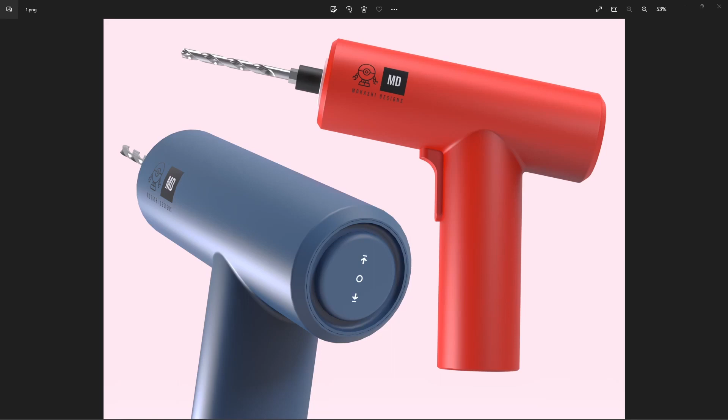It's Yash Mukash here, and now we are going to see how to create a 3D model of a minimalistic drill like this in Fusion 360 software using commands which you have seen earlier.

So let's get started. I have already created a drill machine, this is what I created. I majorly used the extrude command to create this cylinder, this grab handle, this button, and these cylindrical mountings with the drill bit. After that, I copy pasted this drill machine, gave them colors red and blue, and then did the rendering part in the rendering workspace. So that's it, let's get started.

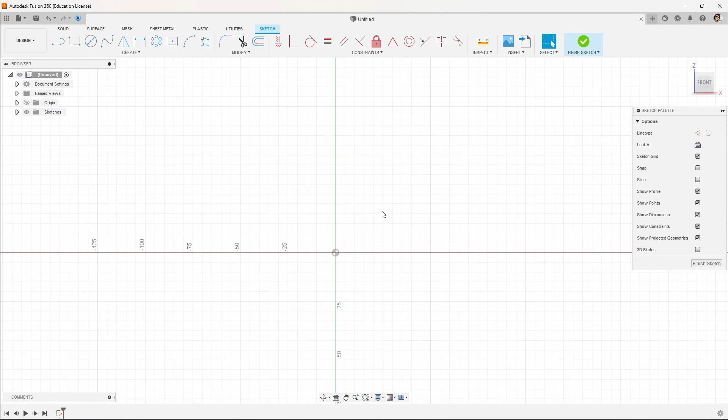First, we will start with the main cylindrical body. For that, first you have to create a sketch. I'm going to select this plane, then create a circle like this. I'll give it a 100 mm dimension and then finish this sketch. After that, select this profile and go to the extrude command.

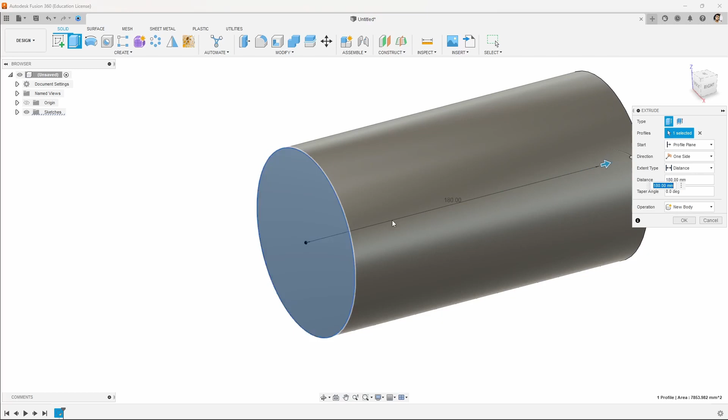I'm going to rotate it a little bit for a better view and then drag it just like this. Okay, drag it, and a little bit more, yeah, that's it, then hit OK. Once you've done it, now we have created this cylindrical body. Now we will continue with this cylindrical main body.

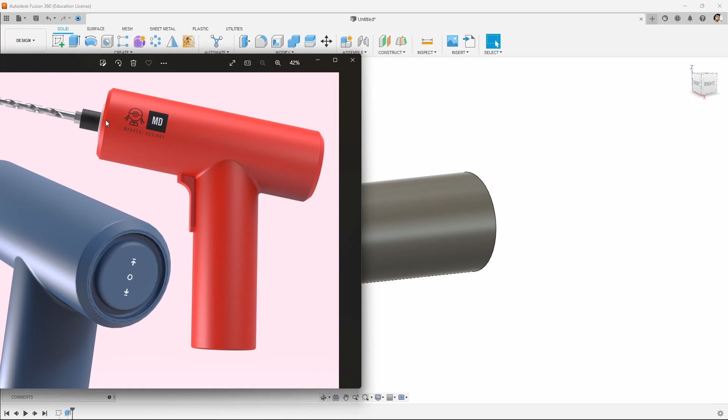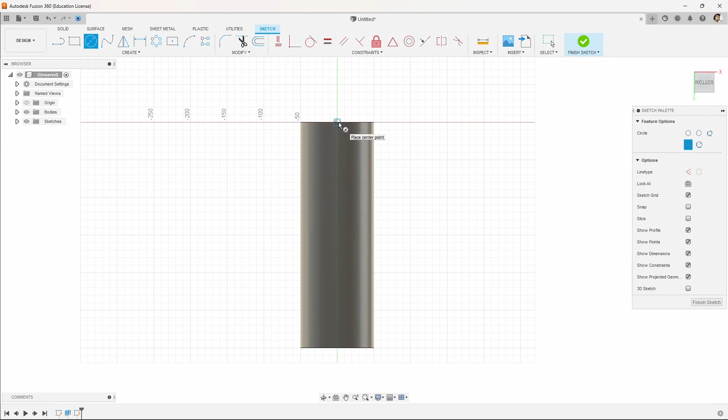Now we will create this grab handle, and you can see this is a little bit at an angle. So what we will do is create a body and then join it. First select this plane, then create a circle using reference of this center point. You have to draw a circle of 95 mm, then hit enter, then finish this sketch and select this profile.

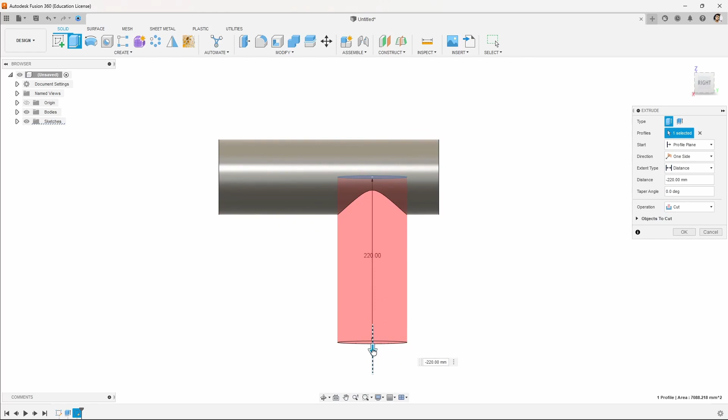Then just drag it like this. Now if you can see, this is cutting this cylinder. We don't want that, so we will change the operation in this extrude dialog box. Right now the operation is cut, so we will change it into new body, then drag it a little bit like this and hit OK.

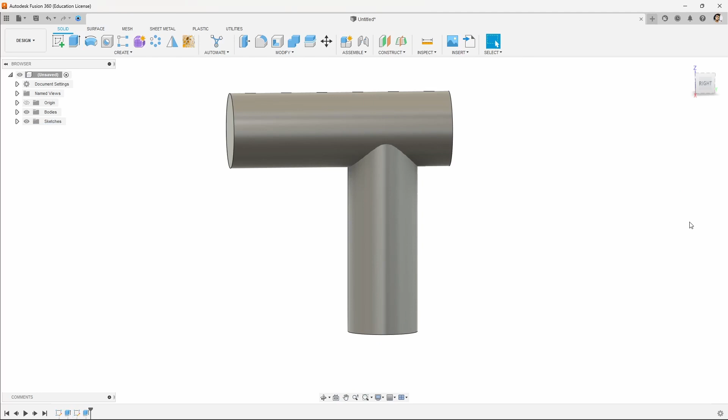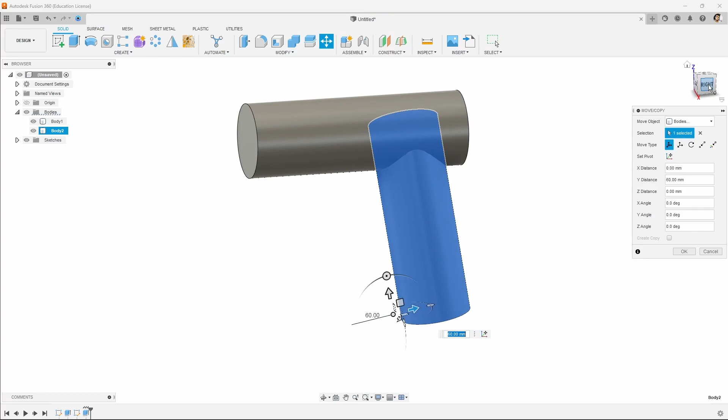Now in the browser, if you drop down this body section, we have two bodies. I have selected this one. Just right click in your canvas, select the move command, rotate it a little bit like this and place it over here. We like something, yeah this is good, then hit OK.

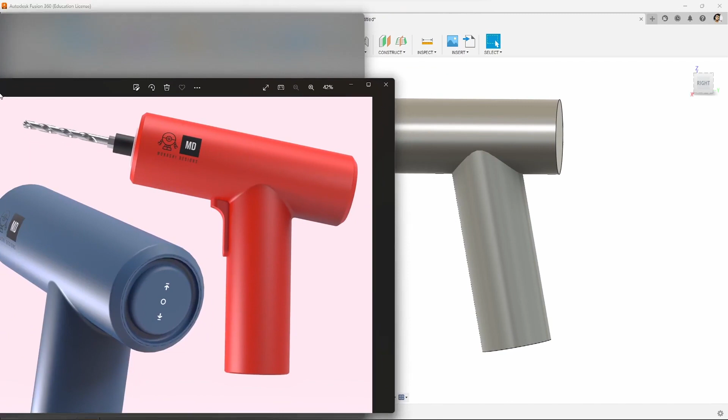So basically what we have done is created a body similar to like this. So this is a basic overview. Now we will do the detailing.

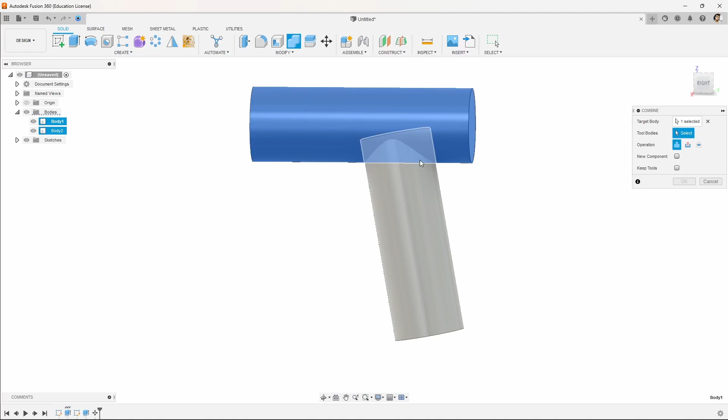First, join these two bodies, and for that go to the modify tab. You will find this combine option here, or you can click here for the shortcut, then select these two bodies and hit OK. If you see the change, now these two bodies are combined together and create one new body.

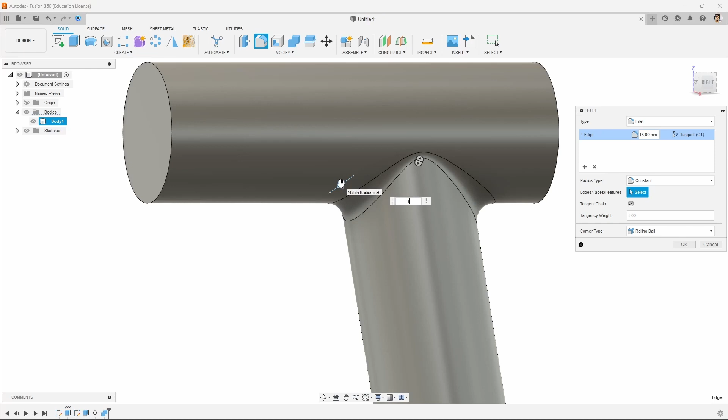Now we will add some fillet at this edge, and for that go to the modify tab and select the fillet command, giving a fillet like this. I'm giving 10 mm fillet and then hit enter on your keyboard. Now I will do a similar fillet over here at the bottom of the grab handle of 5 mm.

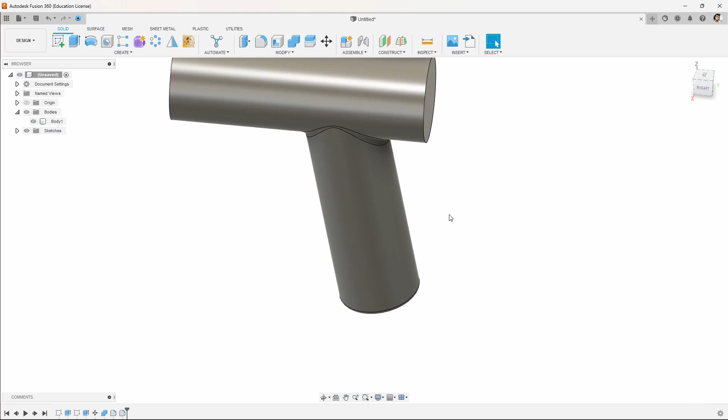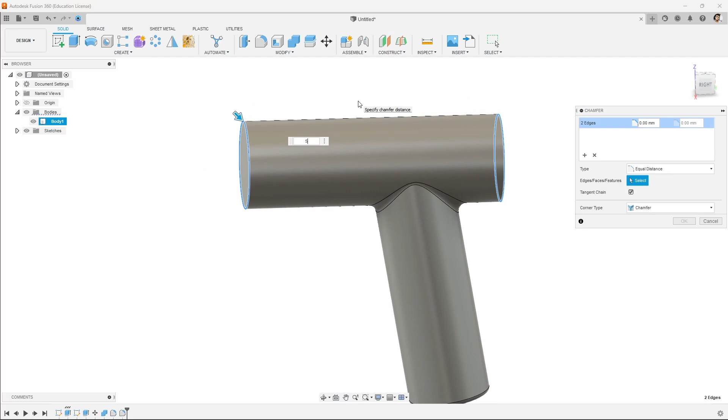Okay, that's better. Now I will create some chamfer over here at these two edges. Go to the modify tab and select chamfer, or you can click on your keyboard and create a shortcut for that also. I'm going to add some chamfer over here like this and then hit OK. If you can compare these two designs.

So what we have done is create first a cylindrical body, then a grab handle, and combine these two bodies, then give a fillet over here, and then add a chamfer at the end of this cylinder.

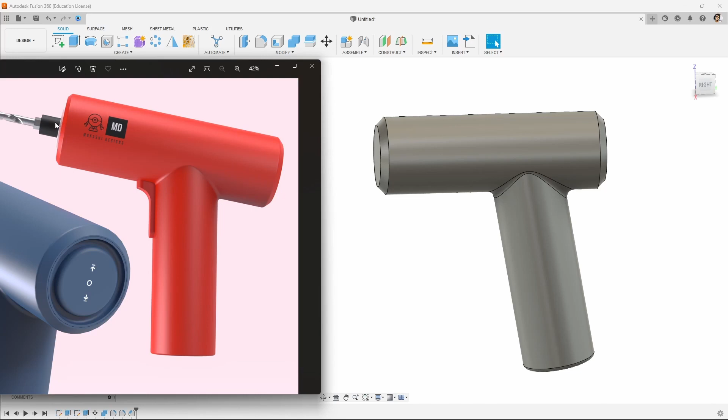Now we will add these two mountings and then add a drill bit. For that you have to select this plane first, then create a sketch on it, select a circle, select the center point and draw a circle of 55 mm, then finish the sketch.

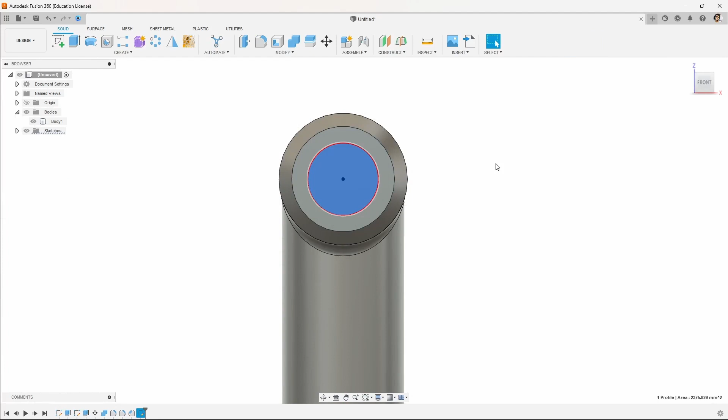You can give dimensions according to your need, I'm just giving the dimension in an aesthetic way. Then hit E on your keyboard for extrude and extrude it a little bit. This is too far, okay, 5 mm is good.

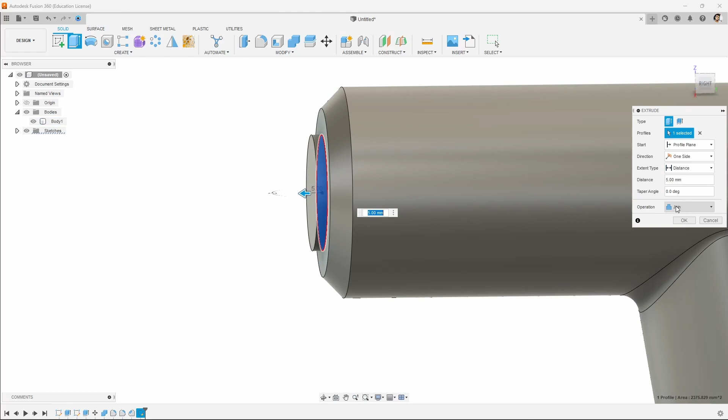You can see the operation is joined now, that means this body will combine with the original body. We don't want that, so we will change the operation to new body, we want a new body, a new part there. Then I'll hit OK again.

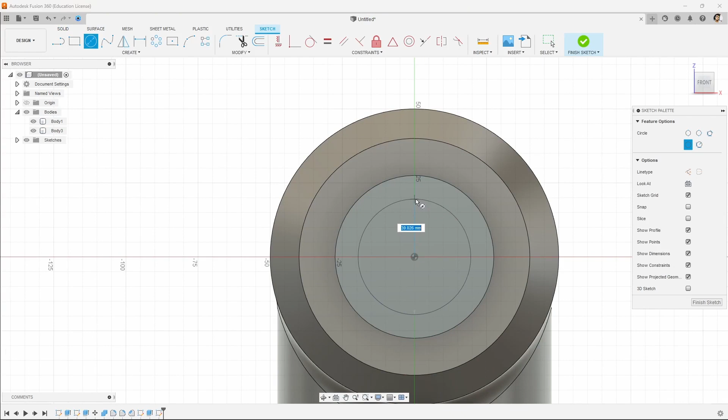Again select this face and create one more circle which is a little bit smaller than the previous one. Select this profile, then extrude it again, something like this. Again you can see the operation is joined, we will change it to new body and then hit OK.

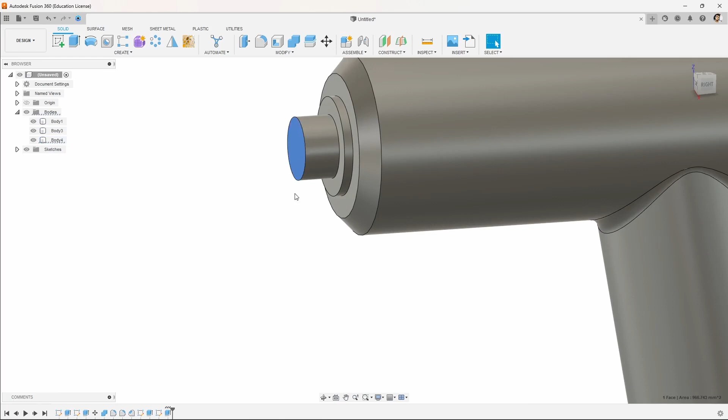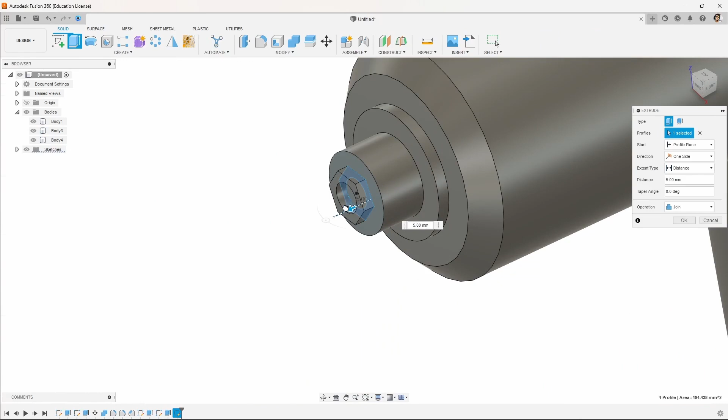So basically we have created a mount and we need a mounting part over here. For that I'll again create a polygon. Just go here, click here, and create a little polygon like this and add a circle to it. Finish this sketch and create an extrude of this profile like this, then create a new body operation and hit OK.

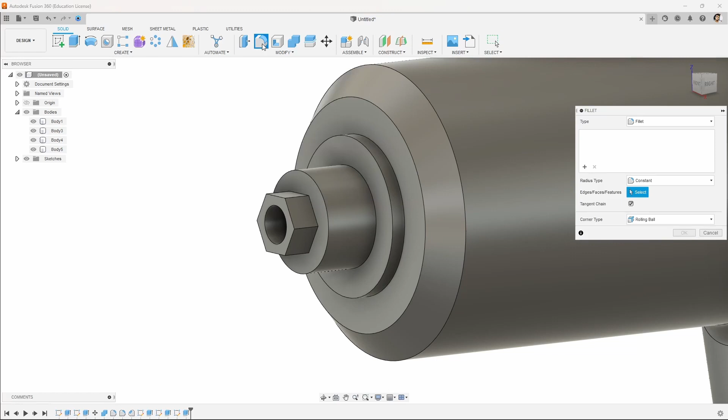Okay, so you can see these are very sharp corners. We don't want that, so we will add a little fillet. For that you can hit F on your keyboard, or go to the modify tab and hit fillet, giving some fillet to these corners like this, then hit OK. These are sharp corners as well, so we'll add a bit of fillet here, give it 5mm of radius, and hit OK.

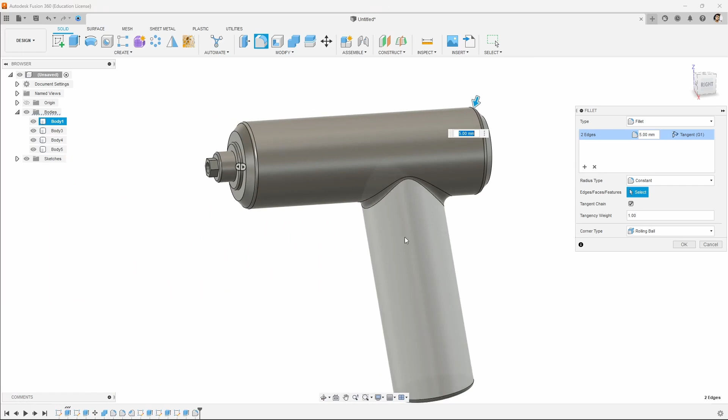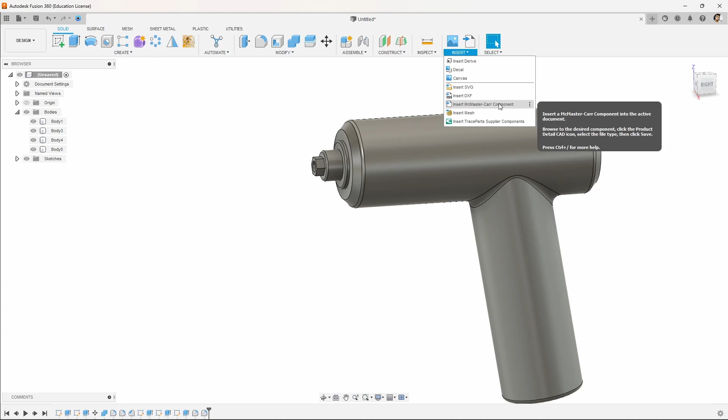Now you can see we have done the main bodies. Now we will add this drill bit, and you don't have to create it, you can add it from this library. In the insert tab you will see the insert McMaster Carr components option. Click on it and it will open a library. You have to connect to the internet for that, then just type here. You can see this is the standard library with standard parts available, nuts and bolts and every industrial part.

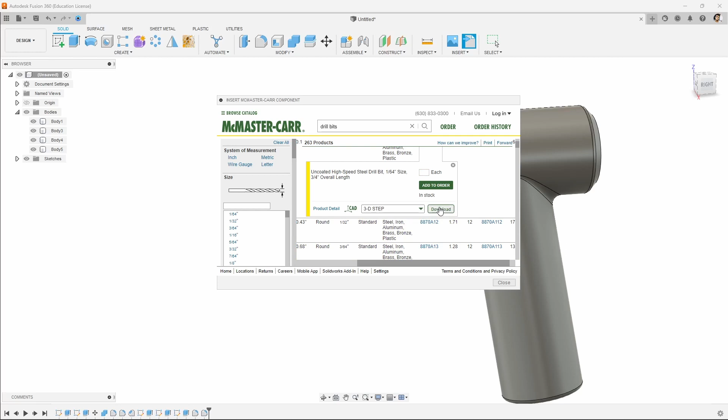So we will type here a drill bit, select any option. We are just creating a model, so we don't need any specific bit. We will scale it down, select a bit, and here you can see an option called 3D SolidWorks. Click on it, select 3D step, and download it. Wait for a moment, it will add here.

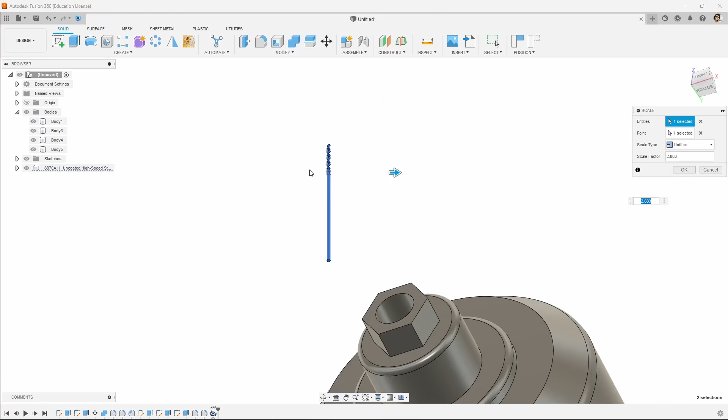If you can see, this is a very small bit. We want something bigger, so click OK, zoom in a little, and go to the modify tab, and here is the option called scale. We will scale this component like this. You can drag, you can see this is a box, this is the multiplication of the original dimension, so I think this is more than enough. Then we will hit OK.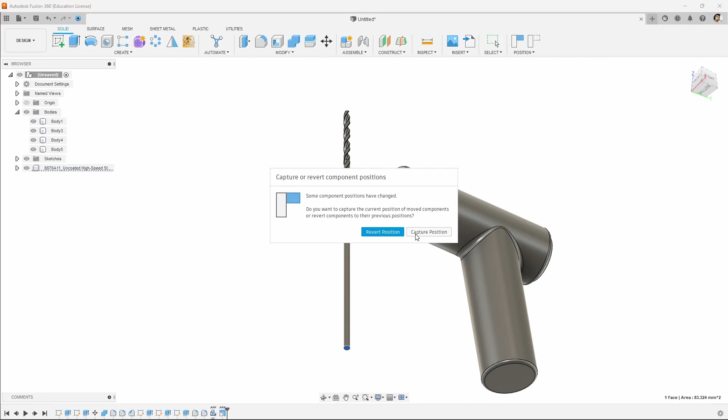I will select this face. You can see this is a very extended bit over here. We will reduce it down. For that, hit E, activate the extrude command, and you can cut it down like this, then hit OK again.

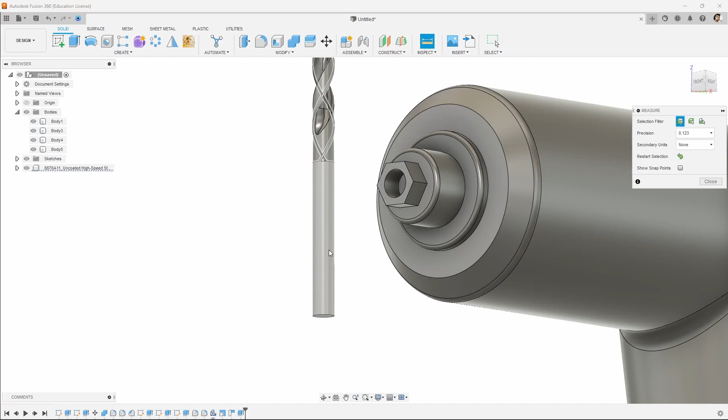Now we want to fit this part into this hole. For that you need a similar diameter. Go to the inspect tab and select this circle. You can see this is a 13.14 diameter, and this is about a proper radius, proper circle, and you can see this is the 10.3 diameter. So I'll go to the modify tab, select the scale command again, type 13.14 divided by 10.3, and it will match that circle.

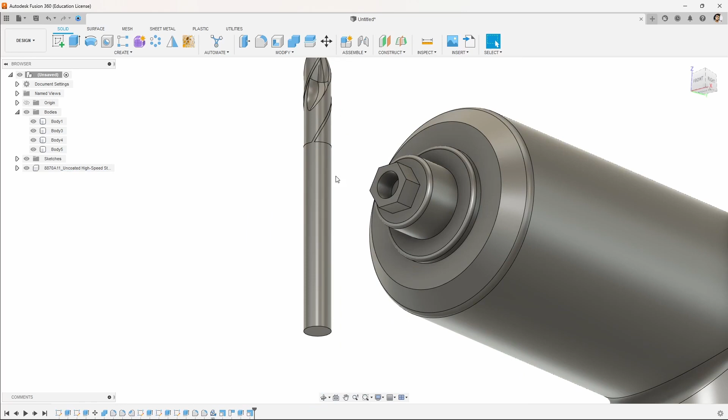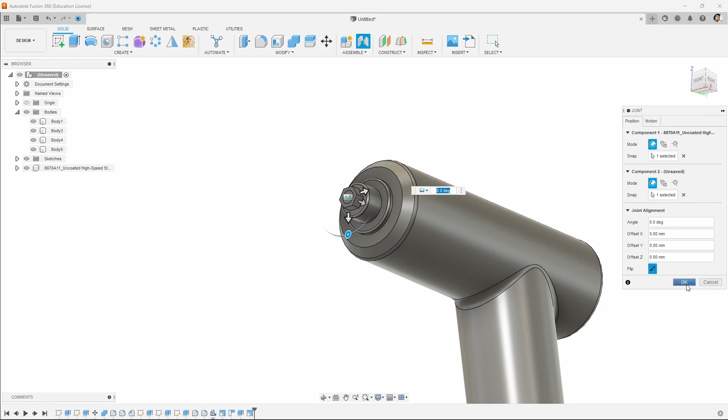So now we want to place this to this point. For that you have to join these two bodies. Go to the assembly tab and hit the joint command. After that select this circle face and then this circle. You can see the drill bit is inside the machine, we don't want that. Just go to the joint window, and here is the option called flip. Flip it and grab this arrow and slide it like this, then hit OK.

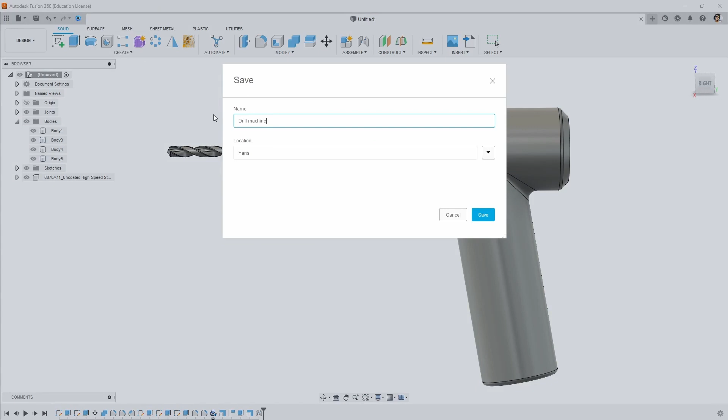If you can see over here at the top, it's called untitled, that means we haven't saved it. Please save the design, otherwise you will lose it if the software crashes. For that you have to go here, or hit Ctrl+S on your keyboard, and give the title drill machine and give the location in the data panel. I have created this project, this file, and then save here. Now you can see the name is changed, Drill Machine V1 means version 1.

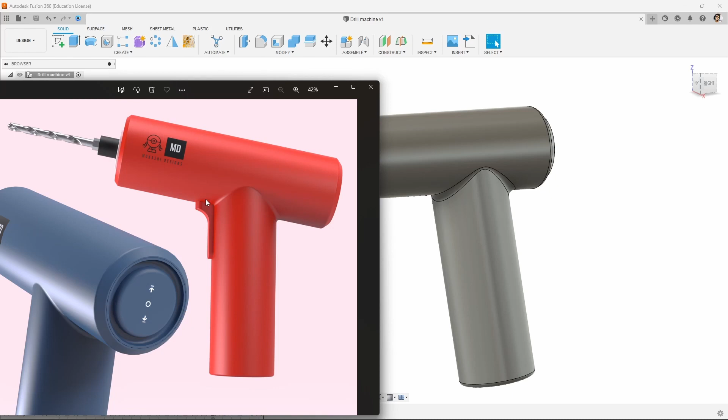Now what we'll do, so if you see, we have created this cylinder body, then handle, these mounting points, and drill bit. The last two things are these buttons and this back panel where the controls exist. So let's start with that.

First hit F and activate the fillet command and give some fillet over here. It will look good when we do the rendering part, I will let you know how to do that. So just give 2 of fillet and then hit OK.

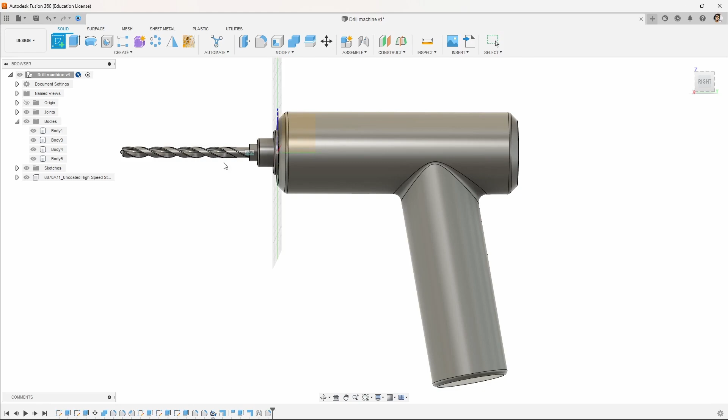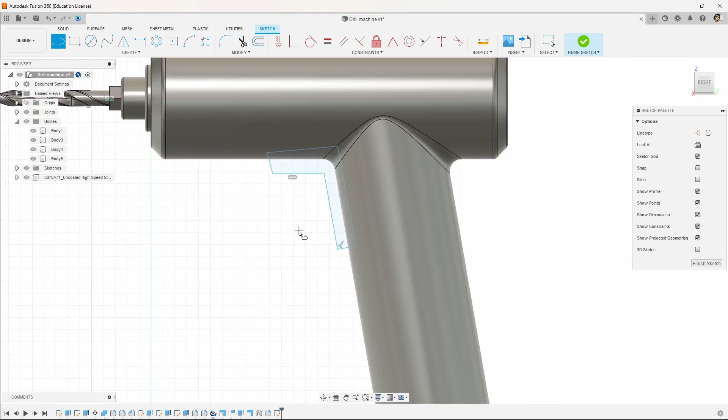Now we will create a button over here, and for that you have to select this plane first. Select the middle plane and then draw a shape using the line command, just like this. I'm extending this line a little bit, then you can click here and here. Now you can randomly draw the lines inside the machine, doesn't matter, we are just looking at the modeling techniques which we can achieve by using the 3D command.

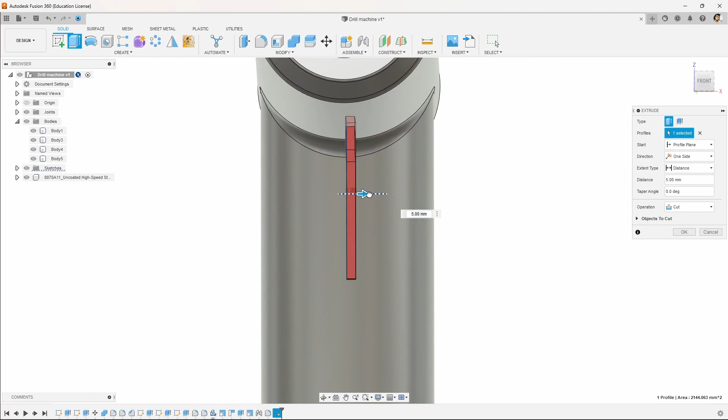So for now just hit the finish command, select this profile, and hit extrude to activate the extrude command. Now we will extend this a little bit, and you can see this is cutting this profile, and the direction is one side. We will change this to symmetric and change the operation to new body. Okay, that's good.

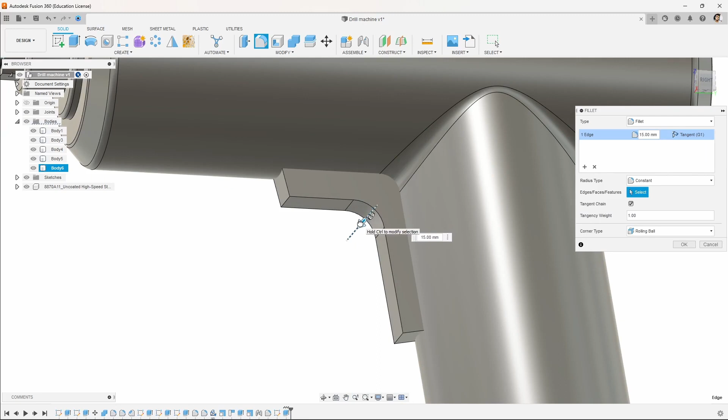Now we will finish this operation. Select this center line, hit F on your keyboard, and give a fillet like this. We need it very smooth. After that, hit the fillet command again and give a fillet over here similar to that. Create a fillet here too, it will look good, and then hit OK.

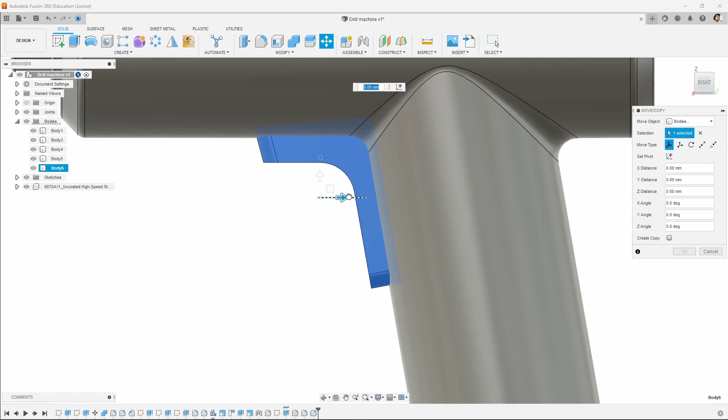Now hit M to move this, get the right view, and slide it down like that, to the upside. Okay, then hit OK. Now we have created the button as well. Okay, now it's good, then hit enter. You can see these are the two bodies.

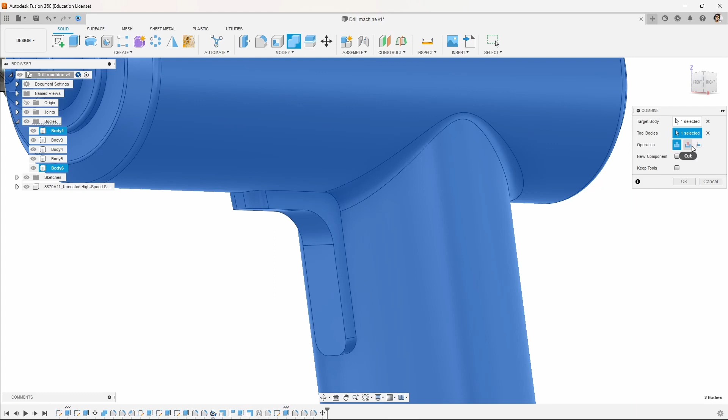We want a slot here. For that, go to the combine option, select this body as the target body, and select the tool body like this. Then change the operation to cut and activate keep tool bodies, then hit OK. Now you can see we have created a slot over here.

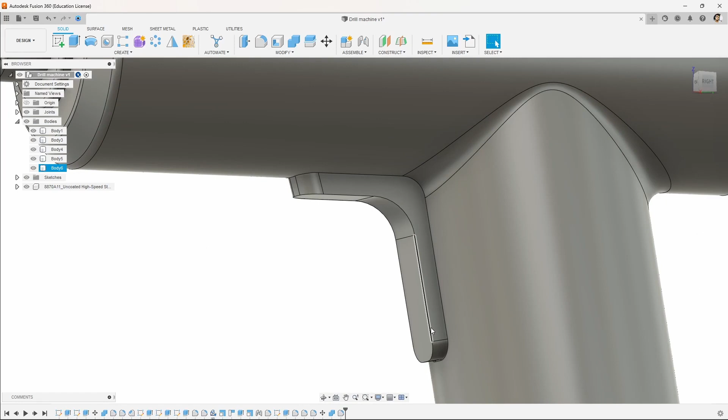Go to the fillet option and select this edge, add a little fillet there like this. Again, this is the button. We don't want it to cut the finger of the user, so it has to be very soft at the corner. So add a fillet there also, like a 2mm fillet I guess. Yes, then hit OK. Now we have created a drill machine.

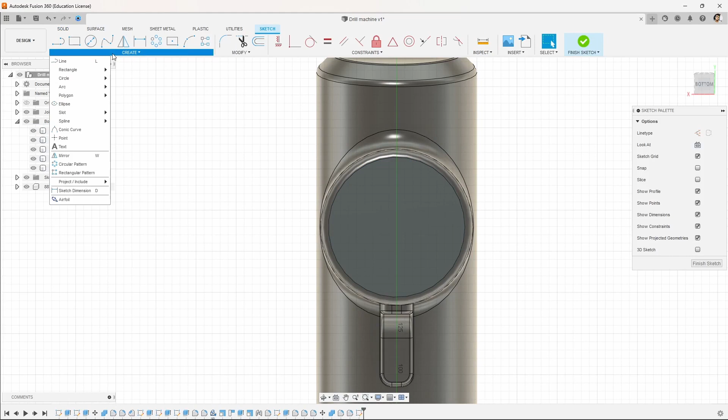We just need a charging point here, suppose it has a C-type charger. So create a sketch over here, go to the create option in the sketch workspace, and create a slot like this. Get a reference point and create a slot like this. This is supposed to be a C-type charger, so just extrude it and cut the slot.

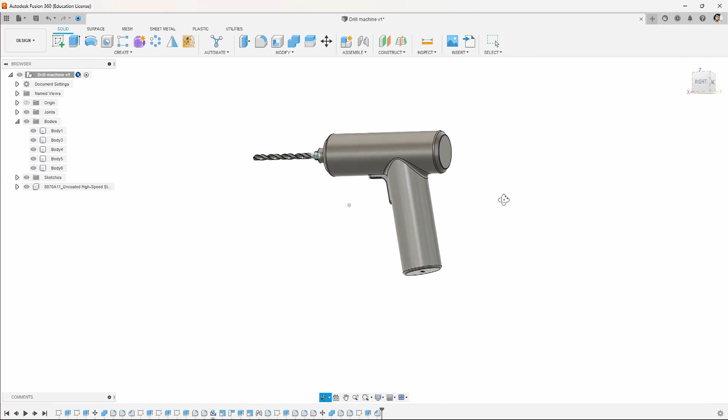Go to the modify tab, select chamfer, select this edge, and add a little chamfer over there like this. Yeah, that's it. Now you can see we have created a model almost similar to this.

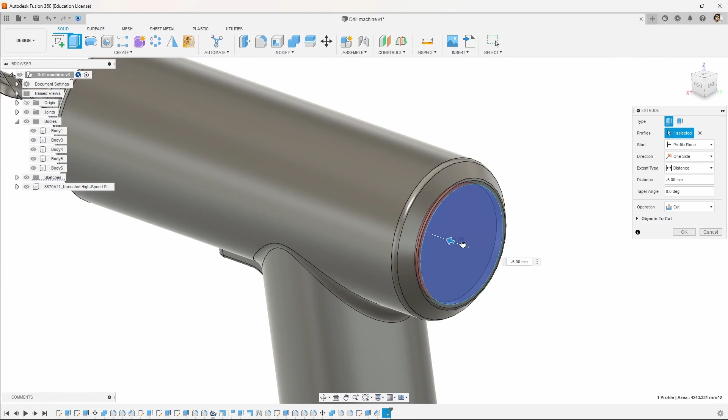Now we will design this part last. For that, select this face and create a sketch on it. Create a circle over here like this, then finish the sketch, select this profile, and cut it down a little bit like this. Yeah, -5 will be fine, then hit OK.

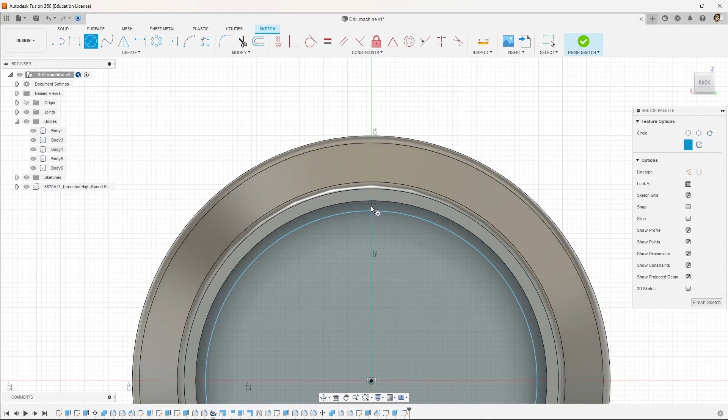Now again select this face, create a circle something like this. Just don't make it similar to that other circle, give it a dimension so we can see the difference here. Finish the sketch, select this profile, extrude it to this face, create a new body, and hit OK. Then add a fillet of 0.2mm to this edge, 0.2mm, that's good, and for this edge also 0.2mm. Now we will add a control system over here.

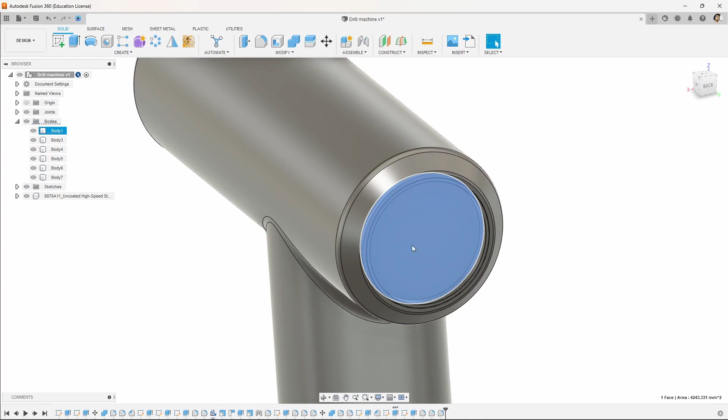For that, just create a circle again like this. We have used circle most of the time along with the extrude command to create this drill machine, so the extrude command is majorly used. You have to keep practicing and you will get to know how it works, what its behavior is, and on that basis you can improve your techniques. So it's all about techniques.

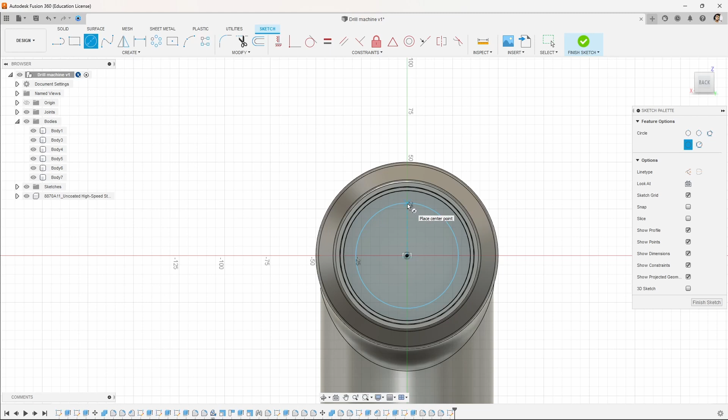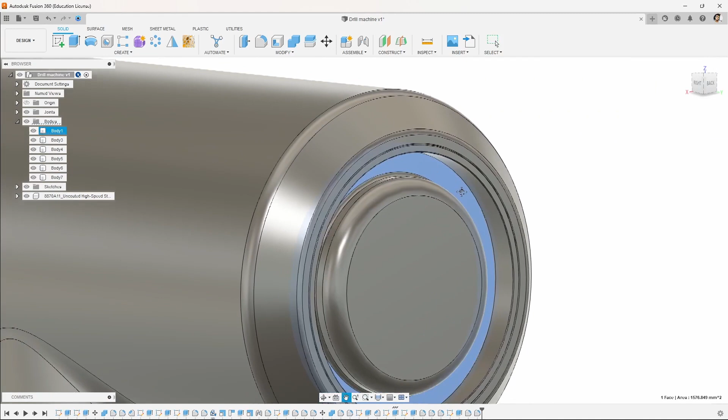I'll click here, escape, and finish the sketch, then extrude this circle till here, 8mm, and join this. Then hit F to add a fillet like this, and again add an outer fillet to these lines and create a fillet like this. You can see we've cut it too far, so I don't want that. Just select this face, hit Q, and drag it like this.

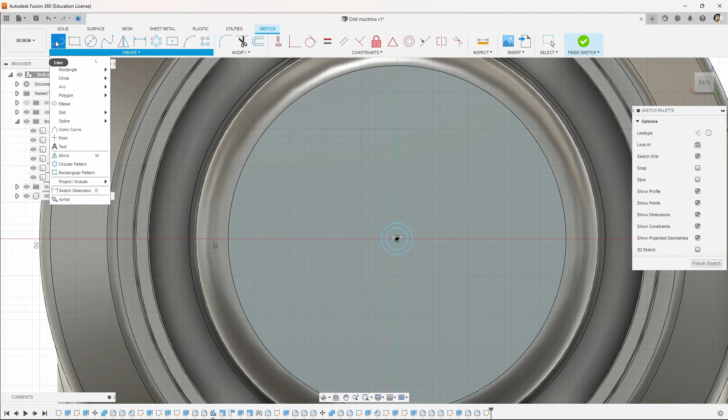Okay, so that's it. Again we want to add control points over here, so select this face, go to the sketch, and create a circle something like this to add an indicator, then we will add an arrow. We will create an arrow, and for that you need a center point rectangle. Just get a reference of this center point and create an arrow over here like this, then create a line. So this is how we created an arrow at this top.

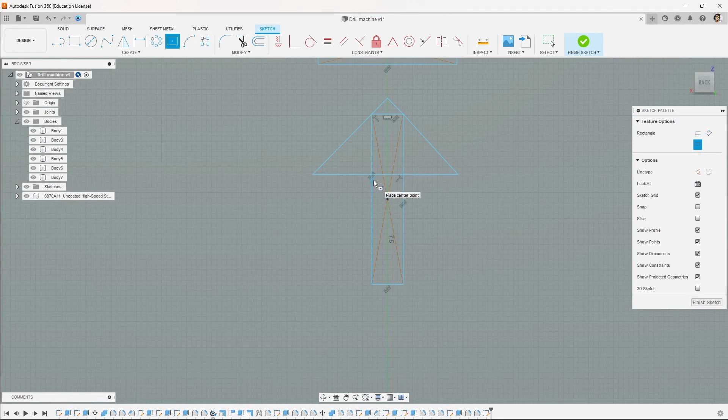You can create a circle, you can create a rectangle just like this, then hit T to trim these middle lines, we don't want that. Then go to fillet in the sketch command and add some fillet over here so it looks a little cool. We want it to look aesthetically good, and that's why we are adding a fillet, then hit enter.

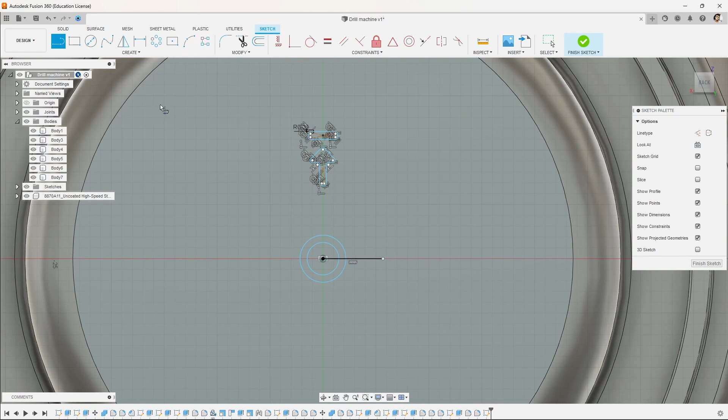Now draw a line from this point to this point. I'm telling you, I'll tell you why we add this. Go to mirror, select all the sketch, and select this mirror line. That's why we added this line, then hit OK and finish the sketch.

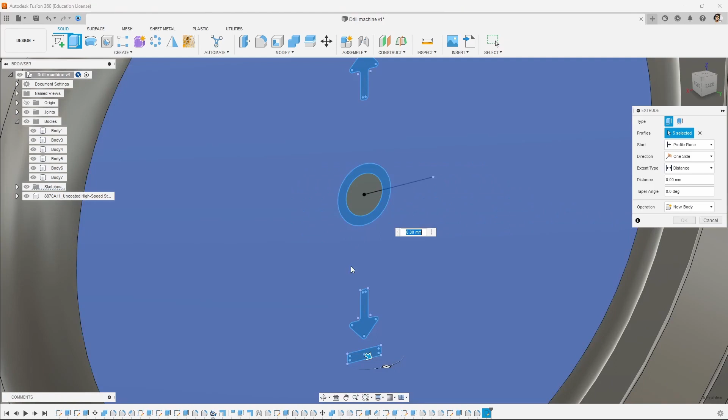Select all these profiles we have created like this, press Ctrl and select so you can select multiple profiles. Then hit extrude, extrude it a little bit, change the operation to new body, and hit OK. Now you can see we have created a minimalistic drill machine.